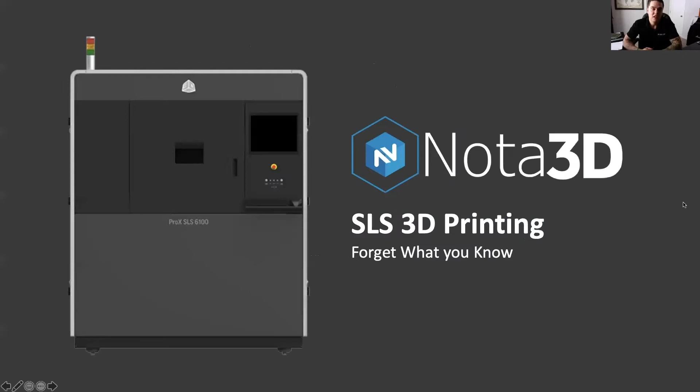So I'm excited to talk to you guys about 3D Systems SLS 3D printers and how investing in this technology could help your business. SLS, which stands for Selective Laser Sintering, is unlike any other 3D printing technology because it prints parts that are every bit as strong as injection molded plastic parts. No other print technology delivers what SLS does: production grade parts that meet or exceed engineering requirements for strength, durability, heat, chemical resistance, and biocompatibility.

SLS is a robust process that makes robust parts. And how we're doing that is we're fusing parts together with heat and directed laser energy. SLS printers are big and they look like industrial production equipment because they are industrial production equipment. So 3D Systems is making a splash in production, and SLS is a big way that we're doing that. These are just a few industries that are using SLS extensively.

So one of the main adopters of all 3D printing technology is automotive. We're helping them with compressed product development cycles, functional prototypes that meet heat, strength, accuracy, and mechanical requirements, bridge production, toolless manufacturing of injection mold quality parts. With aerospace, we're helping them with faster time to market, lightweight, high value production plastics, improved assembly through custom jigs and fixtures. Healthcare, improved surgical outcomes through patient specific surgical guides.

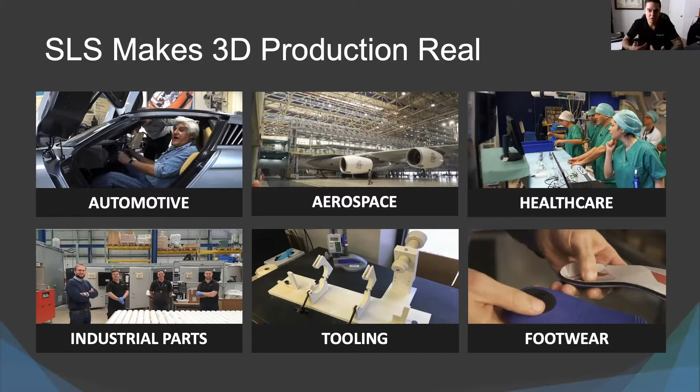As I mentioned, SLS makes production possible. These parts are just about as strong as molded parts and superior to all other plastic 3D printing technologies. The only 3D printed parts that are going to be stronger than our SLS parts are from our direct metal printing systems. You can find SLS parts in UAVs, they're on F-18s, Bell helicopters, and fuel tanks and transmissions. So right now, if you need production grade nylon parts with tough mechanical properties, SLS is going to be your best option.

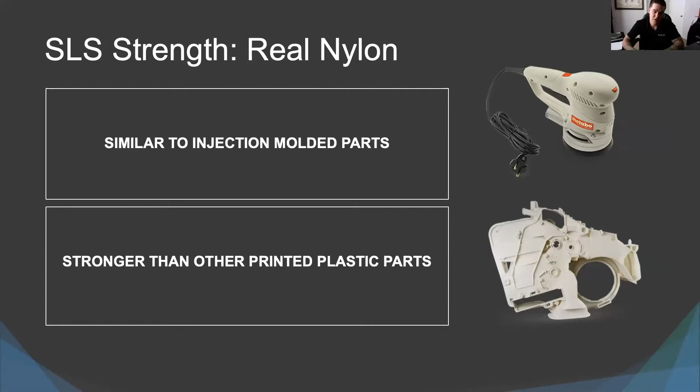So I've already noted that SLS produces parts that have comparable properties to injection molding, just slightly lower on the impact and elongation. Now let's compare what happens when you run nylon 12 through SLS versus when you run it through FDM. It's very clear that the process matters. The SLS print process yields parts that are superior in almost every single way, even when they're both made with essentially the same material. And the FDM process just results in micro voids between each layer, which makes the parts a little bit weaker.

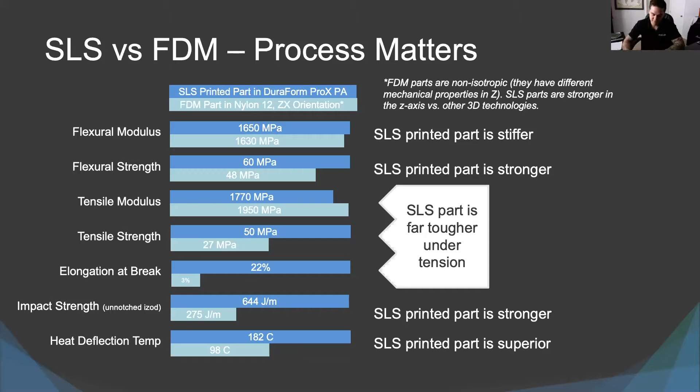But there's a huge benefit when it comes to speed. So there's simply no faster way to get these strong parts. A real world example that we took here would be, let's say you needed 250 parts that are about 2 inches by 2 inches. The Pro X SLS 6100 takes about 33 hours from the time you load the CAD file into the software until you have finished parts in hand.

FDM would take almost 10 straight days of printing plus hours of manual support removal to make those same 250 parts. And then of course, to go to soft tooling and mold a run of those parts would easily take 2 weeks to get the tools, plus a few hours for setup and then shoot the parts. So having an SLS printer in-house could dramatically speed up your production cycle.

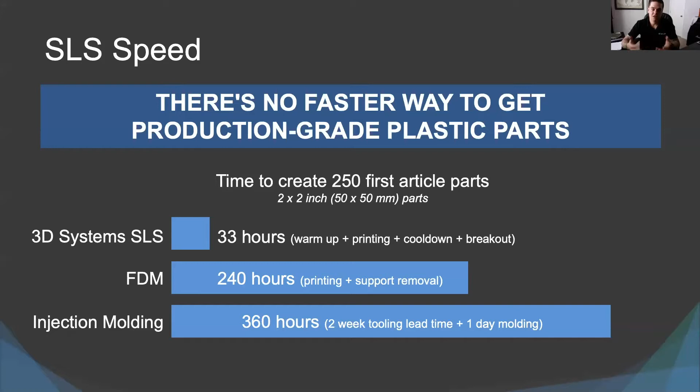One thing that people absolutely love about SLS is that it doesn't require any support structures. The powder surrounding each part holds it up while each layer is printed. So when the parts are done, all you have to do is pull the parts out of the surrounding powder, use pressurized air or brush to clean off the residual powder, and that's it. There's no supports to pry off, no additional steps to cure or bake or anything else. This also means that you can print more types of geometry because you don't have to worry about how to support certain shapes.

So this is a quick snapshot of our current SLS portfolio, ranging from 60 liter to 230 liter build volumes. The Pro X SLS is the newest and the next generation of the SLS platform. So the Pro X SLS 6100 is the newest of all of our SLS systems and is the most automated of all the SLS printers. It has an integrated material quality control system, which we call an MQC. And the 6100 is the best choice when you need high surface quality and mechanical properties.

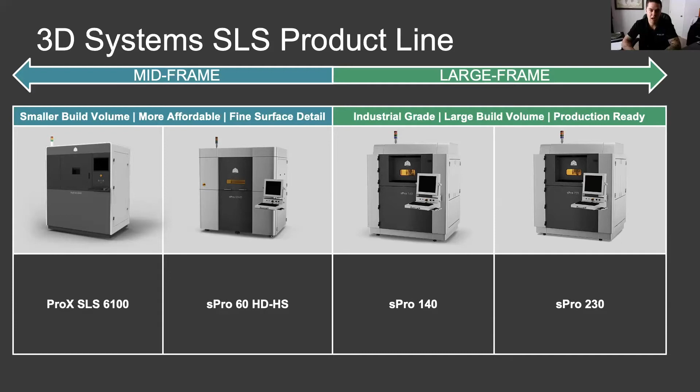The S Pro series are a little bit more flexible in terms of materials, especially the S Pro 60, but they don't feature the level of automation that the 6100 offers, and it doesn't offer the entry-level price point. But they do enable additional materials, and we do have 2 larger build volume options with the S Pro machines. But for the purpose of this webinar, we're going to focus on the Pro X SLS 6100 as it is the newest SLS platform. This machine is excellent across the board from production to prototyping. It offers a very attractive total cost of operation and ownership.

Many people have an outdated image of SLS, and that's kind of what sparked the whole reason why we wanted to do this webinar, is because we talked to a lot of people that have maybe used SLS back in the 90s or early 2000s, or they just have an image that SLS is very messy. There's powder everywhere. It's very manual, and that's changed a lot. And so that's really what we wanted to focus on here. And the 6100 offers automatic material handling, which makes the process significantly cleaner and also saves time and money.

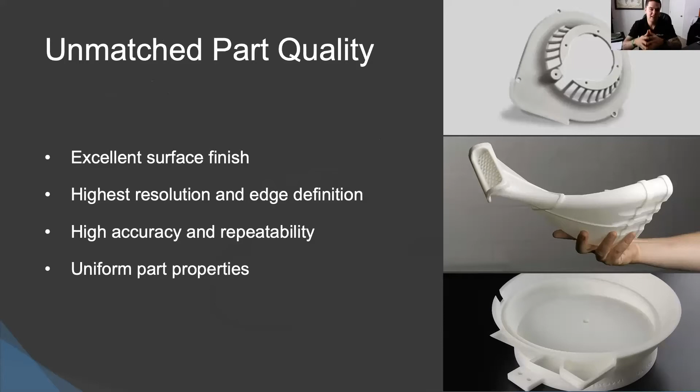Using the DuraForm ProX nylon materials, the 6100 delivers best-in-class part quality for demanding end-use and functional prototyping applications, as well as a 20% lower total cost of operations when you compare it to similar printers. The material quality control system, so the MQC, provides automatic blending and recycling while providing transportation of the material to the printer, so you don't ever have to get hands-on with the powder.

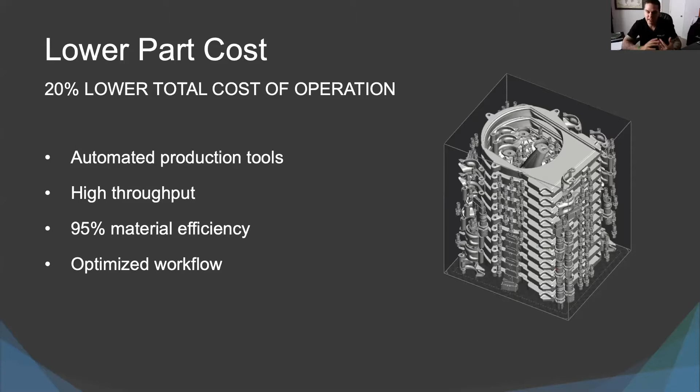Auto nesting is also a key feature of the 3D Sprint software. It's going to help optimize part orientation in the build area, and we're going to dive into this a little bit further, maximizing the print capacity without sacrificing quality. You're going to get a lot more parts per build, saving time and minimizing waste.

So I briefly talked about the MQC, the Material Quality Control System. So there's two different MQCs available right now. There's a single MQC, which supports one printer, and then there's the dual MQC, which supports two printers. The MQCs come with a user interface screen that lets you define the material blend ratio in 5% increments on the single, and then up to 1% steps on the dual MQC. There's an integrated remote cooling station, material tracking, a downdraft table to recycle the unused powder, and then, as we talked about, automated powder blending.

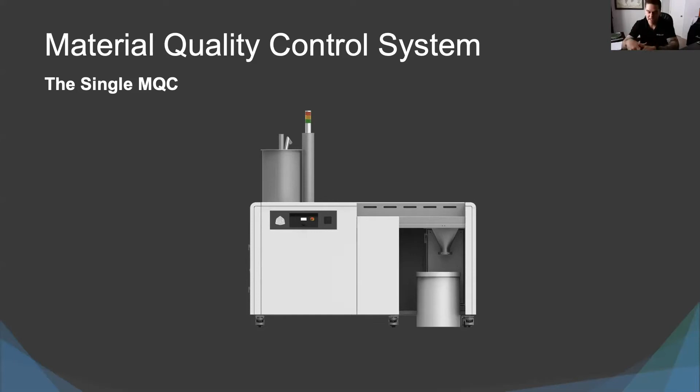So now we'll dive into some of the different materials that are available on this machine. 3D Systems has Nylon 11 and Nylon 12 in both black and white. We also have aluminum filled nylon, glass filled nylon, high temperature, plus we have USP Class 6 and food grade certifications.

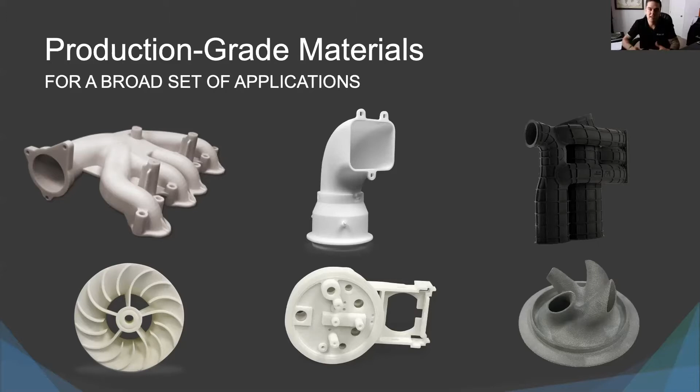The Duraform ProX EX is our standard Nylon 11. This is great for durability for long life, excellent impact resistance, fatigue resistant for applications like living hinges that require hundreds of open and close cycles. So this is a really great application for this material. Fuel and oil resistance makes it great for automotive applications, and the parts have the toughness required to replace injection molded ABS and polypropylene.

Duraform ProX PA is our standard Nylon 12 powder. Strong, tough thermoplastic, stands up to the rigors of long-term real world testing, and we can also use this to replace traditionally injection molded parts. Excellent mechanical properties, outstanding surface smoothness, stable dimensional and mechanical properties over time, and this material is biocompatible and food safe. There's not a whole lot of technologies or materials out there that can claim food safe.

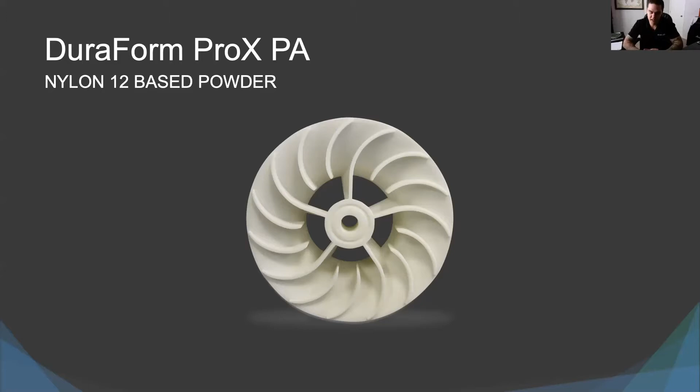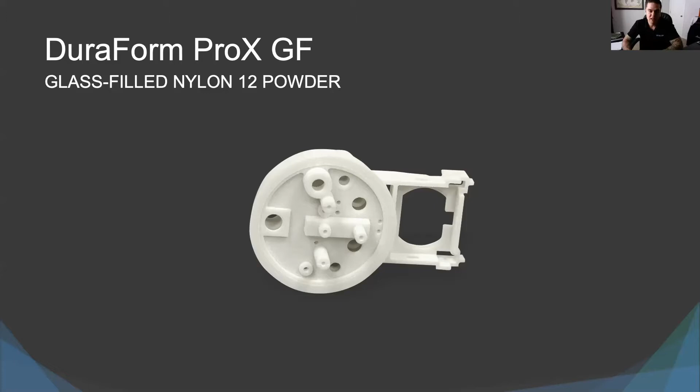So the Duraform ProX GF, that stands for glass filled. This is an excellent material for mechanical stiffness and elevated temperature resistance. It's dimensionally stable and easy to process. It has a very nice surface finish, and it's accurate and repeatable. So it's a great material to use for those types of applications.

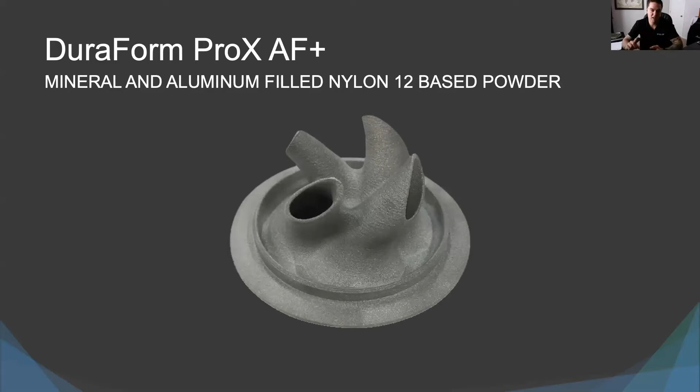Now, one that's very unique to our SLS machines is the aluminum filled nylon. This gives you a nice aesthetic metallic finish directly off the printer. Complex designs can have that metallic look with functional strength at an affordable cost. Repeatable mechanical properties for consistent parts. It's easily machined and polished for additional press fits, tapping, or other uses, and it offers an excellent stiffness to weight ratio.

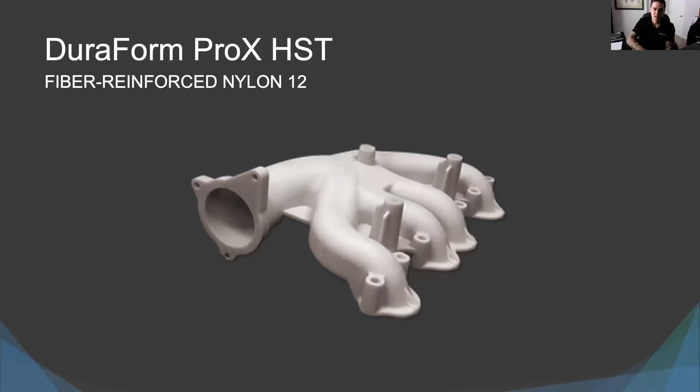And the last material we're going to dive into here is the Duraform ProX HST. This is a fiber reinforced Nylon 12. Again, this really helps with elevated temperature resistance. It has high stiffness and strength to weight, and a really nice surface finish. It's non-conductive and it's RF transparent as well.

So we touched on our 3D Sprint software a little bit, and if you've watched any of our other webinars, we talk about 3D Sprint as well. 3D Sprint actually drives every single one of our 3D printers outside of the metals technology. We have lots of customers that have different 3D Systems equipment in-house, and it's really nice to be able to use one software to drive all of those printers. So for SLS, there's no need for third-party software.

There are tools for high performance, high density 3D nesting. There are quality checks for pre-build verification. And there's also the ability to build a sinter cage, a structure generator in the software that Brian's going to dive into later in the webinar when we do the software demo.

Auto nesting is a key feature of 3D Sprint, and it will optimize part orientation in the build volume area, maximizing the print capacity without sacrificing quality. So if you can get more parts on the build, you're going to save time and save money, minimizing waste. The software allows parts to be added even after the build has started.

That's a unique thing as well, because most of the time, once you press print on a machine, and an hour later one of your colleagues comes over and says, "Oh, you already started the printer. I had some parts I'd love to throw on there," they're stuck. So with SLS, this gives a little bit more flexibility there, which is pretty cool.

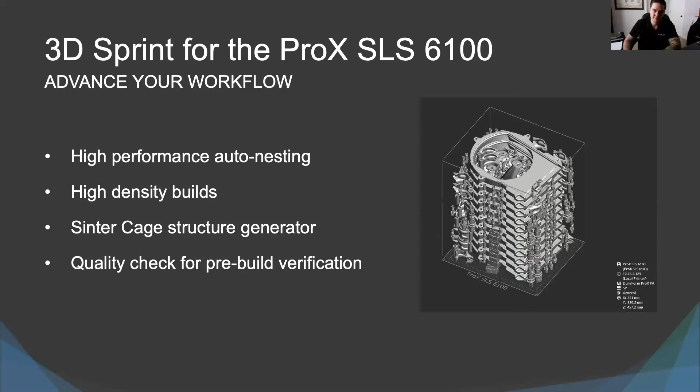This is fairly new. 3D Connect is 3D Systems' Internet of Things platform for additive manufacturing, which hosts a suite of software solutions to increase printer uptime and production efficiency and improve customer satisfaction. The two main things 3D Connect helps us offer is better service, having a direct link to the service department, which is beneficial for the end user, and more uptime. Being able to preemptively see an issue before it becomes a problem is the goal, and that gives our customers more uptime and faster service.

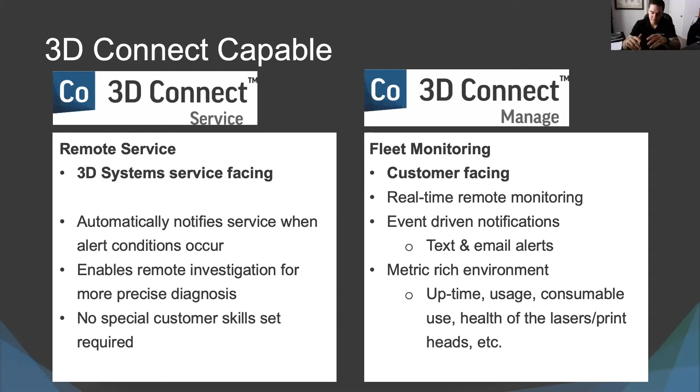So that's our quick overview of the 6100. Didn't want to take too much time and get in too deep with everything. We're going to have Mike from Briggs & Stratton talk next about his experience with SLS, and then we'll also dive into the 3D Sprint demo.

But the key for this webinar is really to give you guys kind of a basic understanding, hopefully update your image of SLS, and then we'd love to dive into that further with you guys, get you guys some sample parts built, or just hop on a call to learn a little bit more about what you guys are trying to accomplish to see if SLS is going to be the right call.

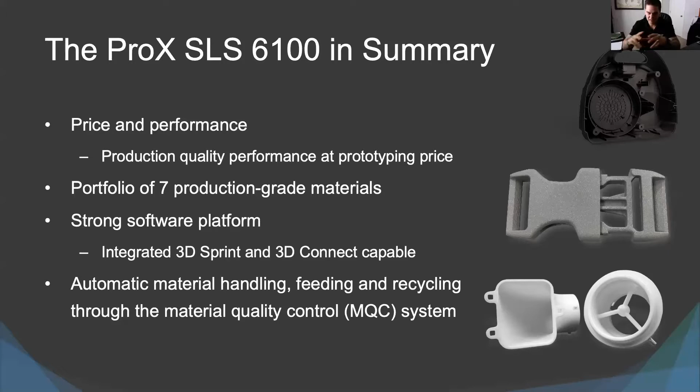I'd like to introduce Mike Dorna, who is the manager of Briggs Stratton's Research and Development Rapid Prototyping Center. Mike has been instrumental in the product development and rapid prototyping activity at Briggs Stratton for over 30 years. He was involved with the evaluation, justification, purchase, and implementation of 3D Systems Selective Laser Sintering System. He also was in charge of several other Stratasys large frame Fortus and PolyJet 3D printers.

Mike, thanks for joining us today and sharing the challenges of your responsibilities at Briggs Stratton and your experiences with the SLS system. I'm sure many of you joining us today have similar obstacles in your companies. Mike, could you tell us a little bit about what you and your staff do at Briggs Stratton and how 3D printing is benefiting that activity?

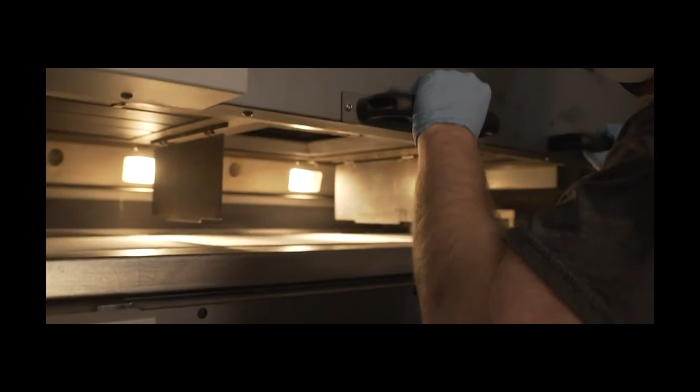All right, we will kick off the 3D Sprint demo with Brian. My name is Brian Carr. I'm a member of the Applications Innovation Group at 3D Systems. 3D Systems is the world leader in 3D printing technologies. And one of those technologies that's near and dear to our heart is selective laser sintering.

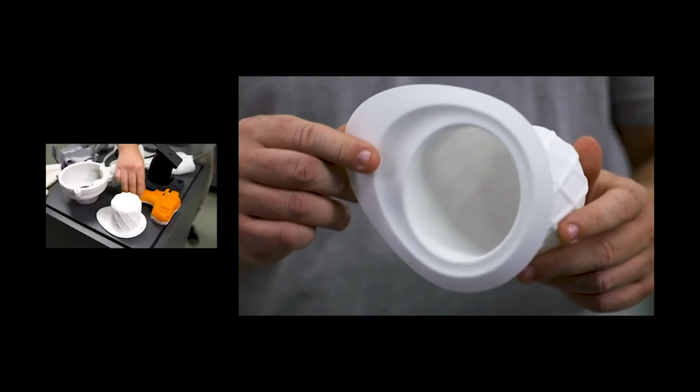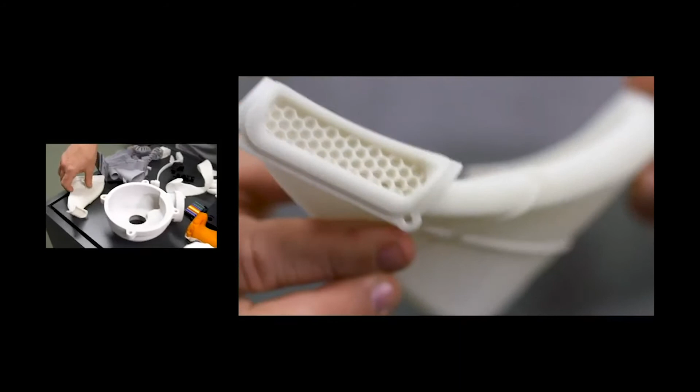Selective laser sintering takes powders, typically nylon powders, and fuses them under the energy of an infrared laser. It preheats those powders under the energy of infrared lamps, and does the layer-wise process over and over again until you have a solid three-dimensional thermoplastic part in your hand.

To prepare an SLS machine for operation, you need some build prep software. Historically, 3D Systems has used a software called Build Setup. Build Setup was written on computer architecture that has now been superseded. So generally, even though computers are faster now, it's still relatively slow. It's a bit cumbersome, and it doesn't do some things that new improved software does do.

The new improved software for 3D printer build preparation is the 3D Sprint software. And 3D Sprint works on several of the printers, but today's focus will be on SLS. SLS has some charming advantages over other 3D printer technologies. Most specifically is the lack of support structures. We'll talk about that when we introduce some STL files into this virtual build volume that you see on the screen. So you open up the 3D Sprint software.

The version I have right here is running in a standalone mode. I'm in a home office miles away from any SLS machine. So what the build preparation software does in a very automated way is it lets you drag and drop STL files, STEP files, IGES files, solid part files into the virtual build space. And then at your discretion, we've made it pretty easy to do, set the job up for the attributes you care most about. I'd like to demonstrate that now.

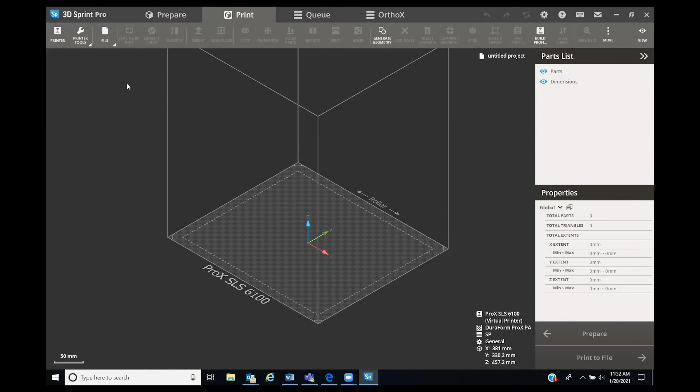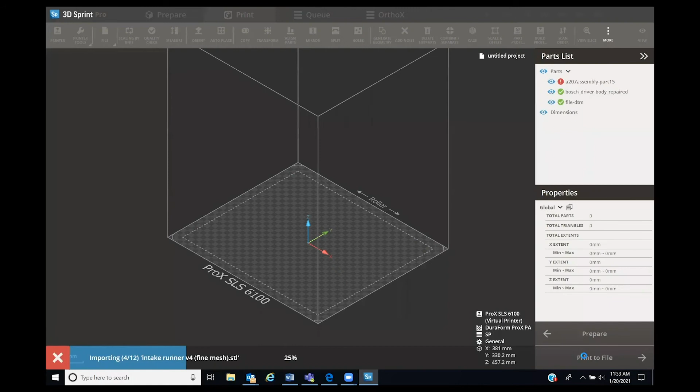So if I come up here and I say, let's import some files. So I will select all of these. And then I'm going to deselect the ones I don't want to bring in. So now I have everything ready to go in. And we see now that everything is annotated with a green check, telling us that the software has given them an inspection for the goodness of the CAD. And it's also given us a verification that we are within the allowable build volume.

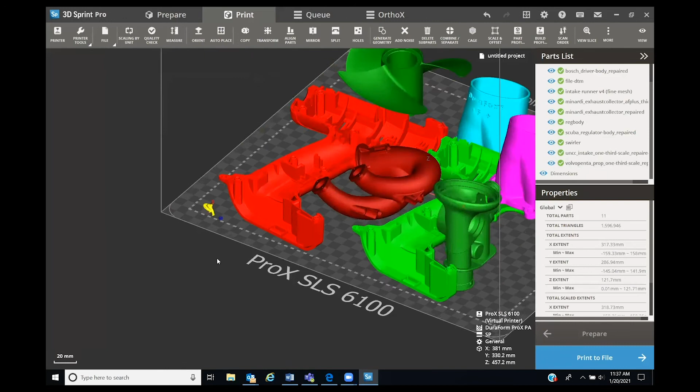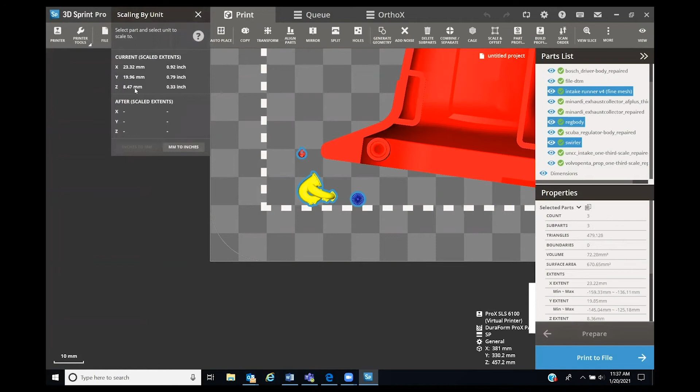I can see now that we also have a slight problem here. We have parts where the units are wrong. I'm going to change the view to the top, and then we'll zoom in on these parts. We'll select them all, scale by unit. Voila. Okay, we made them the big parts that they're supposed to be, but we also moved them out of the allowable build volume. We can auto place these now, and voila. Oh, that's a full-size version of this part.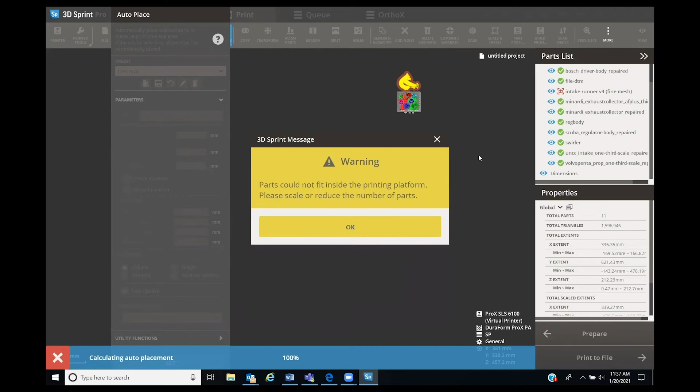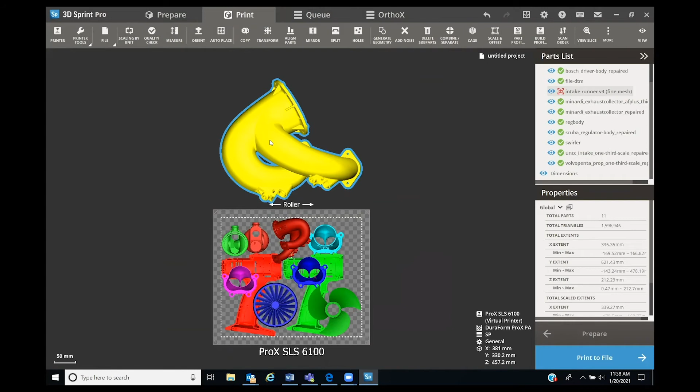For those of you who are unfamiliar with some of the sample parts that 3D Systems shows, that big manifold in yellow is an intake manifold from a Formula SAE car that was built by the University of North Carolina at Charlotte. We rendered this part in our Rock Hill CIC out of GF material, and they ran it on their Formula SAE car, and it worked. Pretty cool. It's too big for this demonstration. I'm going to go ahead and just delete it, and we'll move on with everything that fits nicely into the space.

So I started this discussion by suggesting that SLS doesn't need support structures, and that's one of the many charming things about it. As an operator of SLS, the first decision you make when you want to build a part is deciding, are there attributes of that part that I want to build in the most optimized way? Like any layer-wise process, SLS, SLA, DMP, MJP, any of the layer-wise processes are going to have layer lines, and you get to decide how you want those layer lines to impact the part.

The reason you get that decision is in technologies that have support structures, you may choose an orientation that minimizes the impact of supports, the appearance of supports, or the effectiveness of supports. In SLS, since we don't have supports, we can in fact make decisions based on other outcomes. All of these round parts that you see, this swirler, these exhaust collectors, this small version of that propeller, all of them have generally round features.

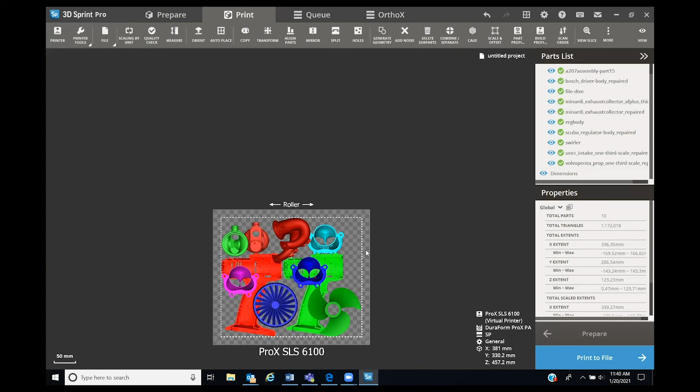And as a guideline for SLS, I would say let the scanner, the digitally encoded high torque motors that drive the mirrors that steer the laser beam around the space, let the scanner draw those features. So what you see here is a good orientation for feature reproduction, letting the slices be generally round, and you get a good outcome. It also means, and we'll go to an ISO view so that we get a sense for the impact on the height of the build.

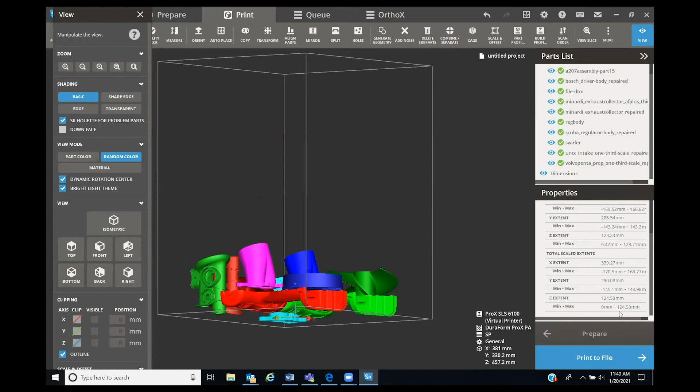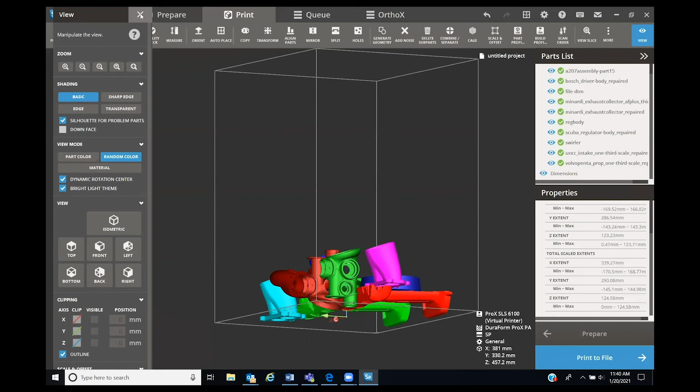We also see that it's not as short a build as could be. Coming over here to this properties panel, we see the Z extent says 124 millimeters, so it's 5 inches of build required to get this job out as we see it here. If we're so inclined to say the parts are not going to have a high level of scrutiny put on them, let's decide to build them as fast as we can rather than as pretty as we can or as well as we can.

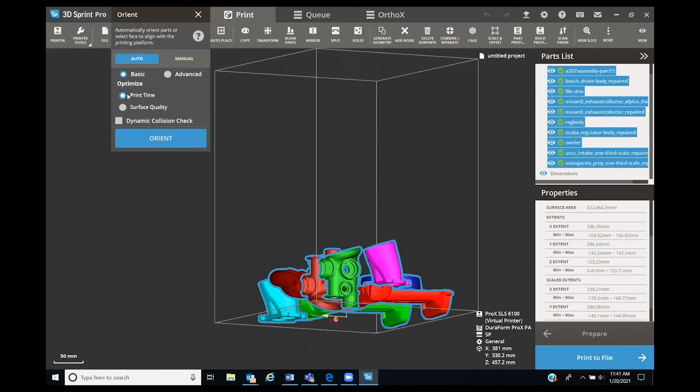I just hit Control-A to select all. We can tell the software in an automated way to orient all of these parts so they build the fastest, okay? And if we make the decision here in the Orient screen, running an auto version of Orient, to let print time be our guiding principle, then it's going to lay all of these things over into the flattest that they can. And as you can see, it also created a bunch of collisions.

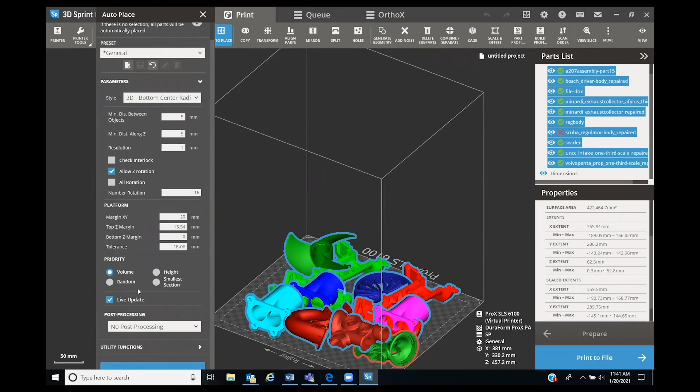At that point, we would auto place, and we would start to use the auto place tools that let it, I won't call it artificial intelligence, but you'll let it start to think about stuff to give you the best nesting of the parts in there. So what I'm going to do is tell it I want height to be the priority. I'm going to allow it to rotate the parts around Z if that lets it nest more efficiently, and then we'll send it on its way.

It's telling us that we're setting up a 6100, running the DuraForm ProX PA, nylon 12 material, and the mode is standard production. Standard production has 0.1 millimeter layers, which is 0.004 inch. So in a very automated way, letting the decisions be made by the software, I was able to get this job ready to go, and it happened pretty quick.

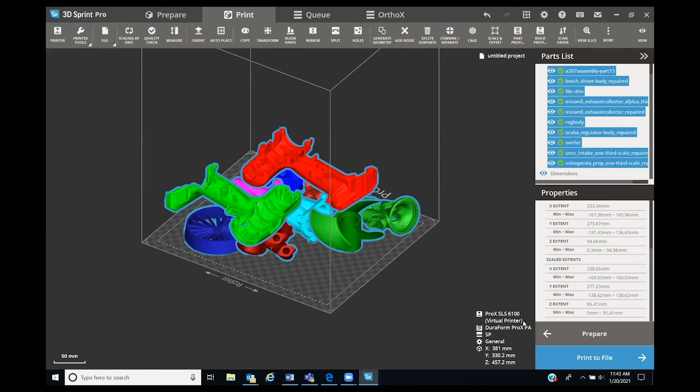Now, I mentioned that the parameters are assigned. These parameters that are assigned are default parameters. It turns out that you may, over the passage of time, decide to use some unique parameters for a particular part type or a particular job. And if that's the case, then you come up to the parameter editors. I just opened up the scale and offset editor.

Scale is the value that we grow the part by to accommodate shrinkage. And you can see it's roughly 3% in the X and Y, and a little better than 2.5%, 2.4% in Z. So we grow the parts by these scale factors to accommodate shrinkage. That's going to happen when they return to room temperature.

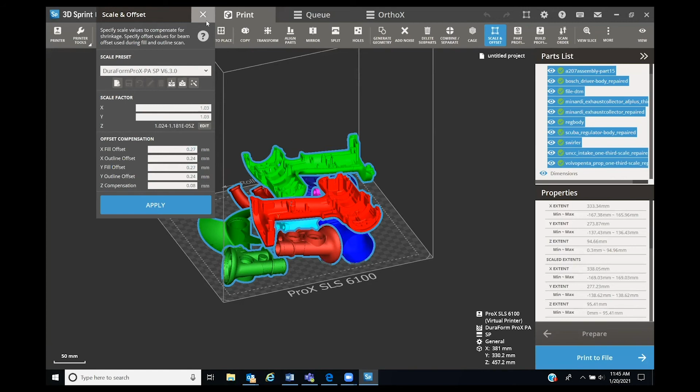When we do our slicing in SLS, it's a pretty simple raster fill pattern, and we offset the raster lines that we draw. We offset them at their beginning end and their finish end to accommodate for laser beam diameter. So in the scale and offset editor, we've created using the default values as I've done here. These are things that are going to happen to each of these STL files, sort of behind the curtain. You won't even notice it's going on. Using the default parameters, let me select any one of these parts.

Using the default parameters for the part, you see that there's a fairly small set of visible parameters in the normal mode. You tell it how hot to hit it with the laser on the fill vector. You tell it how much power to use on the outline, which is a border, if you're familiar with the SLA terminology. You can tell it to do the fill vectors, the parallel vectors first, or you can have it do the border first.

But there's also other parameters that you can turn the knobs on if you choose to. So I'll show you those by clicking the All button, and you see there's a variety of things that you can do should you need to tailor the parameter set for a desired outcome. It's our firm belief that these parameters after installation of the machine are rarely touched. The field engineer comes out with a power meter, he sets the power, he does a build, and people running our gold standard material DuraForm PA find that they just don't have to change parameters on these more stable modern machines.

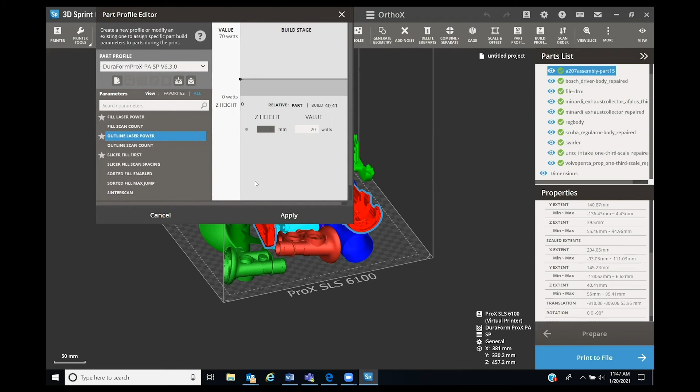Finally, there's a third parameter editor called the build profile editor. And these are the things that affect everything in a build. Temperature, for instance. We can't affect temperature for one part, but we can for one layer. So the things that happen to the whole build are adjusted here. We typically find early on in your relationship with SLS, you'll set the part bed temperature and the feed bed temperatures, which would be in here, and then that's it.

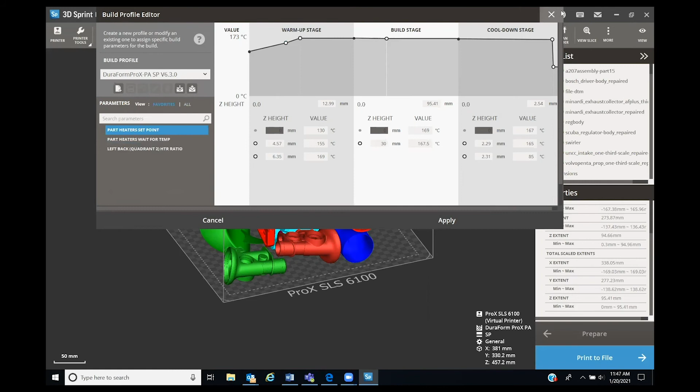At the point that you've populated the virtual build space with your STL files or your STEP files or your IGES files, you've chosen your desired outcome. In this case, we wanted to go for speed. Speed typically happens when you minimize the number of layers. So we let the orient feature get us there, and all of those parts came in with their appropriate scale parameters, their appropriate part parameters, and then the build itself has all of the build stuff.

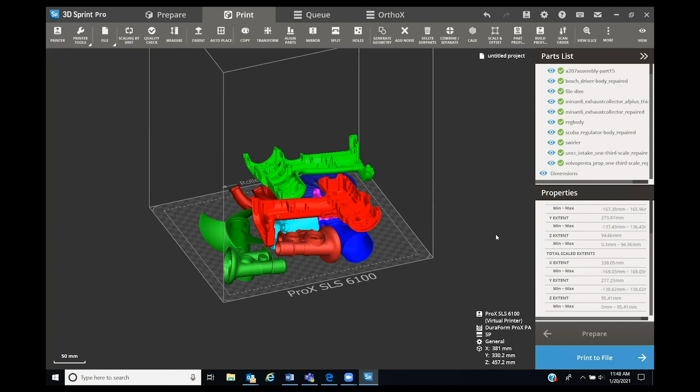At this point, if we were able to send it to a printer, that would be the next command. I'd click a button over here, and voila, the build would be available to you at the printer. That's pretty much it about starting a job in SLS with 3D Sprint as the software that you do your preparation with. 3D Sprint's got a lot of power to do other things. I'll touch on those briefly.

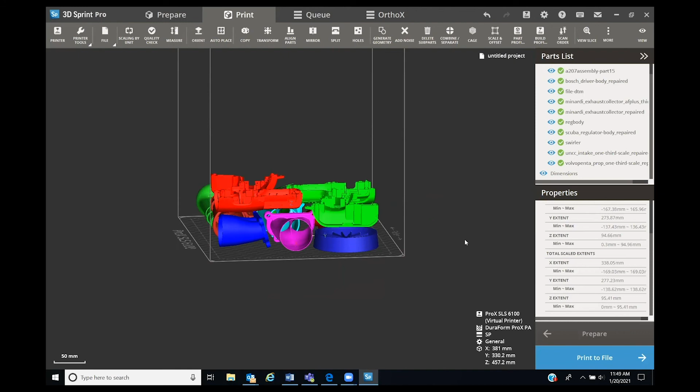Let's say your desire is to segregate some parts because in the post process, you want to have hands on them in a different way. Let's say you're making a medical device and you want to keep that medical device off by itself until you're further along in the post process. What we can do is we can cage parts. It's kind of cool. So let's just grab a part, I don't know, this one. We'll grab a part and we'll build a cage around it.

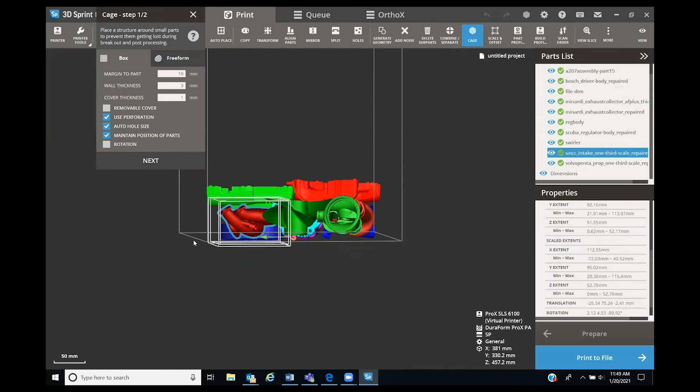And that way, when we're doing our breakout and we look to get the part in hand, we go grab the cage. We carry it around until we want to cut the part away from there. And yes, it sounds like a support structure, but it's not a support structure. It's more of an organizational technique. So if I had a collection of parts, I could cage them too. For this demonstration, we're going to do a freeform cage around a scale model of that University of North Carolina at Charlotte manifold for their Formula SAE car.

So let's generate a cage around there. And when we do, it's going to create a group. And a group in SLS terminology is a collection of STL files that maintain their orientation to each other. They're still individuals. They are still unique, and they still can be treated individually with parameter settings, for instance. But the group has an orientation that is maintained throughout.

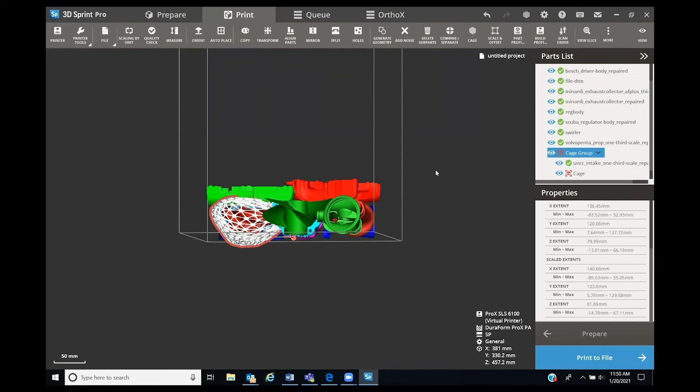So I see that we have this group now, and it is outside of the printing volume. So I'm going to go and just quickly auto place that. And I could have just grabbed it manually and moved it, but I wanted to demonstrate that the software will move it for you.

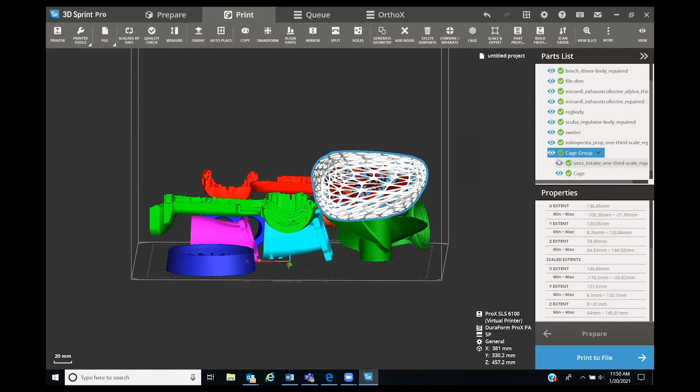So in this case, we see that it's not as efficient a build as it was initially. We'll go to a front view, let me go to a left. I can do a couple of things, like I can grab this part and move it. And I can move it down to the least Z, and then I can move the parts that it might collide with a little bit, and then get to the point where I have a relatively short build,

but now I'm accommodating this new thing that we've entered into the build, the cage about this part. And imagine, if you will, that it wasn't a cage around one part, it's a cage around a collection of parts. And I did that so that they were tied together until some point later in the post process.

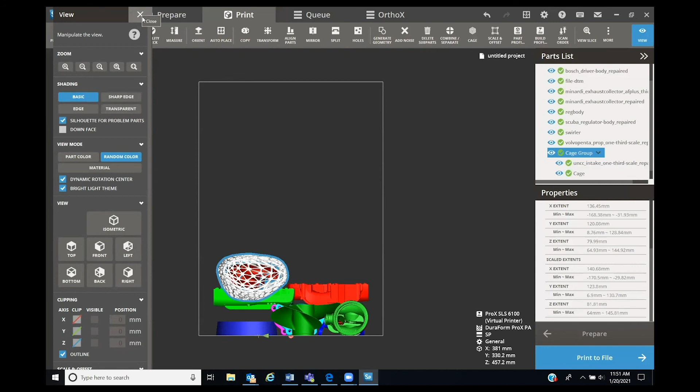So one of the things that's different about moving parts in 3D Sprint versus the software it replaces is, if I grab this part and move it, it will not let me move it outside the bottom. So here it doesn't matter how hard I hit, I can't get it to go outside in this case.

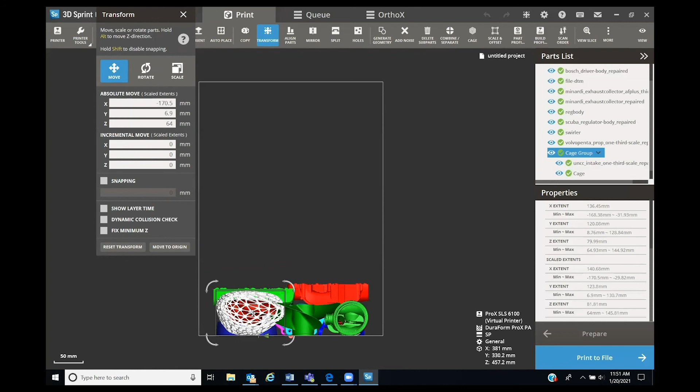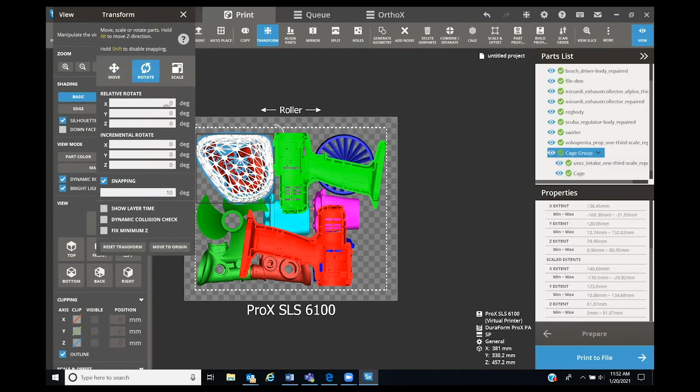And what I can do now is go back to top view, and I can select this part, and I can move that ever so slightly, and I can take this part again, and I can move it with a rotation, grab the handle, something like that, go back to a move. So I have all these options to get the parts into the virtual build space, where I want them.

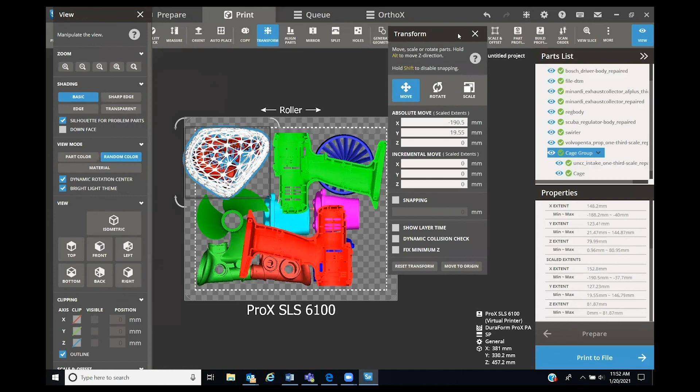Right now, this would be out of bounds because it's going past that little dashed line. That dashed line represents an area that we would try not to use in the SLS space. But in any case, we've done this change. We can now go back to what we did initially, which is select everything and auto place everything for the least Z. Height as our priority.

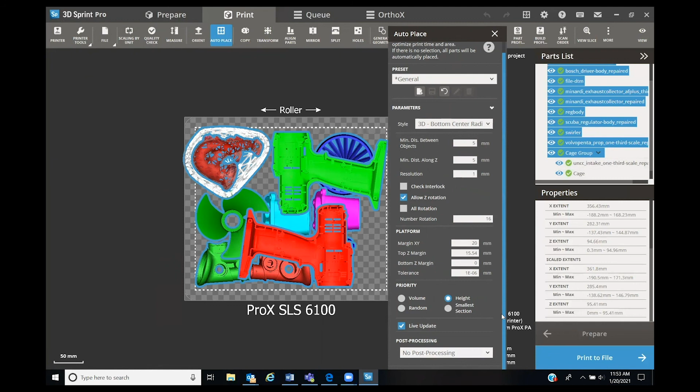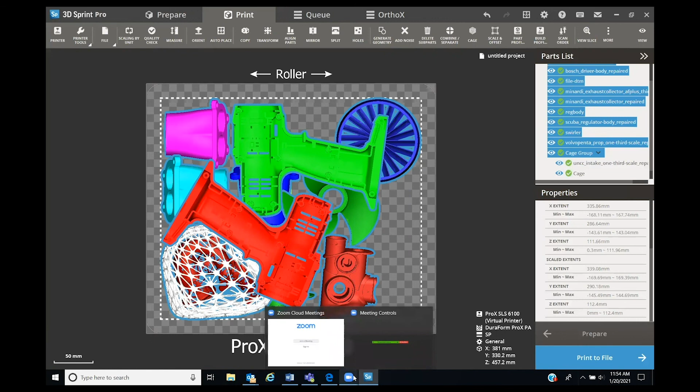Okay, so we just learned another lesson. Well, okay, so first time we did it, we had a 125 millimeter build. Then we did the orient, where we said build in the least number of layers, and then we auto placed that, and it came in at 95 millimeters. And now we've caged a part, so that part is essentially taller than it was.

We've gone back and we've done the auto place again with this now taller version of the caged intake manifold, and our software in an automated way is returning now a build that's 112 millimeters tall. So not quite as short as it was before we caged it, but still 13 millimeters, 130 layers shorter than the original orientation.

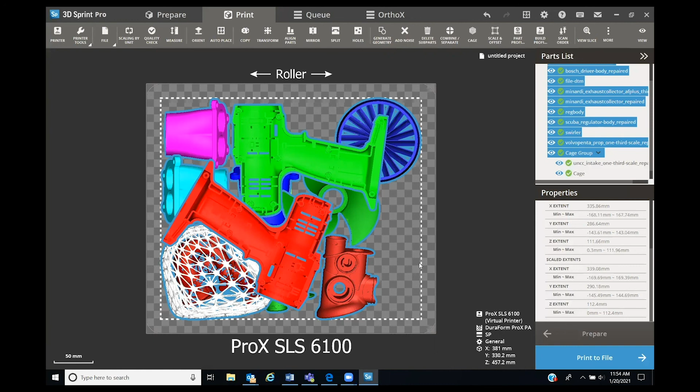Another thing I won't get into because I don't have a part up here to demonstrate well anyways, but another thing that the 3D Sprint software does very well compared to its predecessors is the hollow function. If you have a large blocky part in SLS, you may in fact not need all of the volume in it to be filled. So in an attempt to have something almost like a sparse mode, you can take that part and you can hollow it, and it asks you how thick you want the wall to be. In SLS, generally a couple of millimeters is just fine.

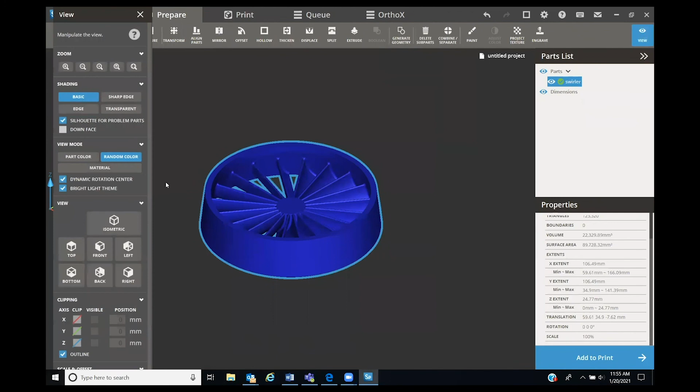I don't think this part has much in it that is that thick. So for demonstration purposes, I'm going to say, let's make it 0.5 millimeter thick walls and hollow otherwise. And let's go to view and see if we can clip it. Aha. So we'll zoom in there, and you can see that it hollowed out the part, everywhere that we see here. I would argue that I'm doing this for demonstration purposes, not to claim best practices.

But if I had a large blocky structure that experience told me the SLS process doesn't need to draw all of it, I can use the 3D Sprint hollow command and end up getting rid of a bunch of scanning that would take place on the interior of a part. And I'm here to attest that the function of hollowing in the 3D Sprint software is much more efficient and comprehensive than it was in older versions of our print preparation software.